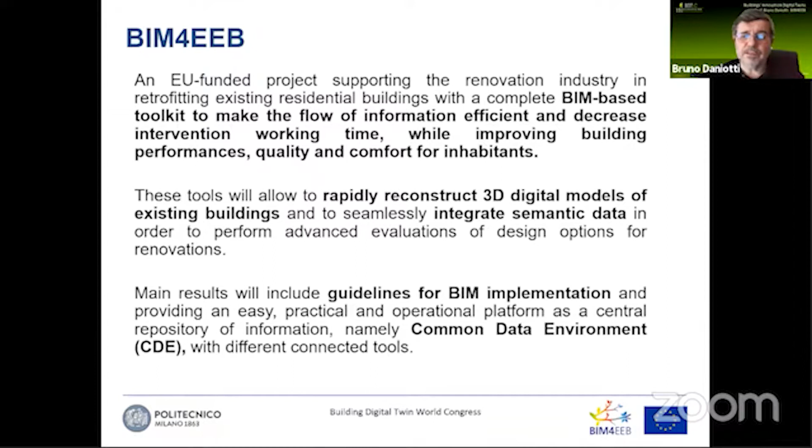The goal is to develop a BIM-based toolkit in order to manage renovation activities, improve efficiency, decrease working time and cost, and also improve performance, quality, and comfort for inhabitants, the occupants of the buildings. Some specific focuses are the reconstruction of BIM models using IFC, open interoperable models for existing buildings, integrating semantic data, ontologies, and linked data. As we have seen in the example with Peter Powers, we are also using these technologies to include data coming from the real buildings. The focus is also to manage everything with a BIM management system organized as a common data environment.

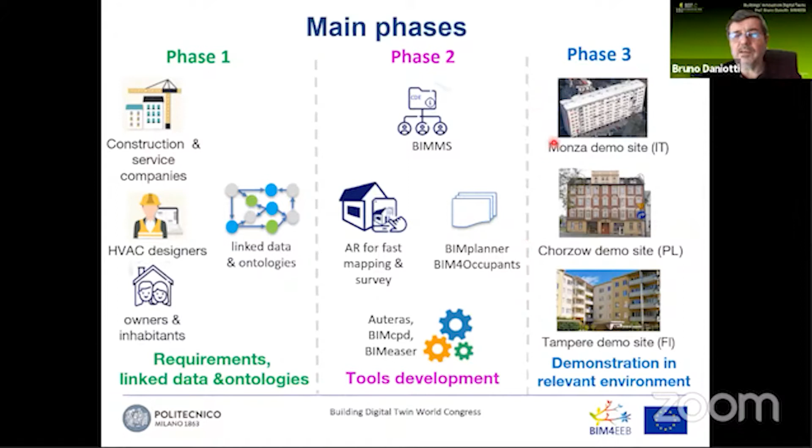So at the moment, the project has developed a preliminary analysis of information requirements with the stakeholders, and a big focus is developing ontologies and linked data to manage the activities. In the second phase, which we are now closing, the toolkit has been developed: the BIM management system, gathering and exchanging data, also linked data; some tools for fast mapping and survey of the building; others for planning the activities; and others for managing information about equipment and so on. Everything is now applied in the demonstration phase on 3 actual buildings in Italy, Poland, and Finland.

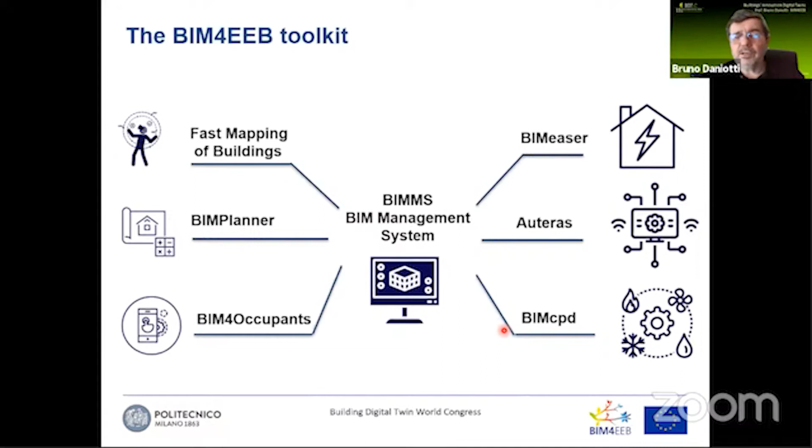So the toolkit has a core BIM management system in order to share all the information in an interoperable way. On one side, we have activities related to managing data: the fast mapping of the actual buildings, BIM Planner to manage the renovation works, and BIM for Occupants to share this information with the occupants of the building. On the other side, we have tools related to the energy efficiency of the building. Some are related to the management of control system automation and the equipment, and BIMcpd is about heating, ventilation, and air conditioning management.

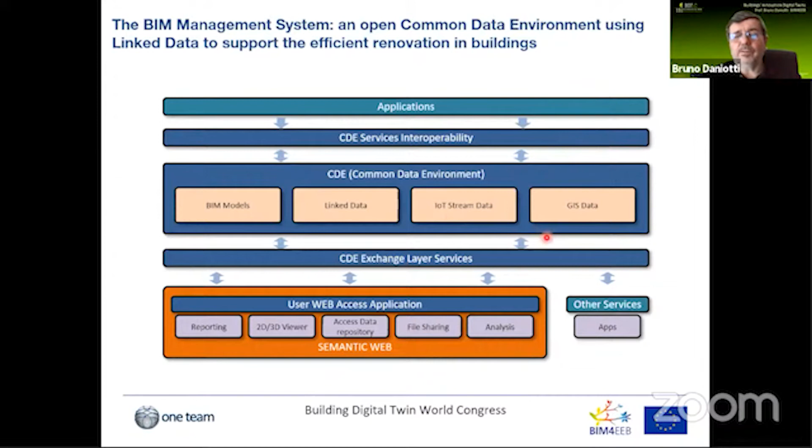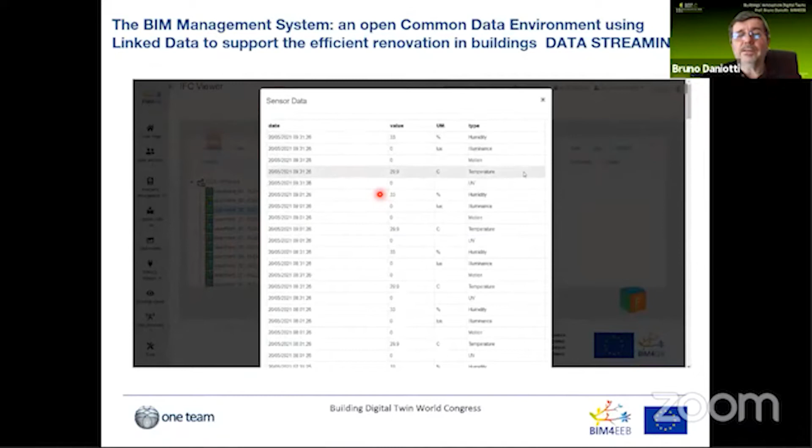So the BIM management system manages all the different data coming from the applications, with different layers for the exchange of data: IFC models, also using ifcOWL to consider linked data technologies, IoT stream data coming from the building, and GIS data to manage information at the geographic level. In this case, we see one example of the IFC of one building, managing also linked data on the sensor data from specific apartments, where it's possible to keep this data and share it with the occupants in order to control comfort and energy levels in the building.

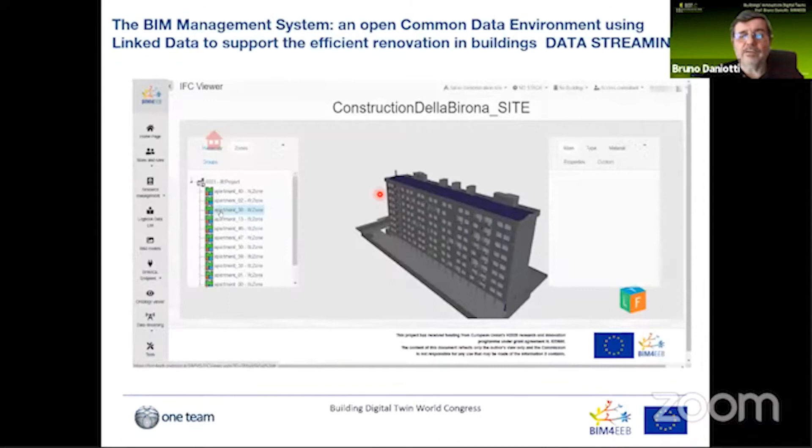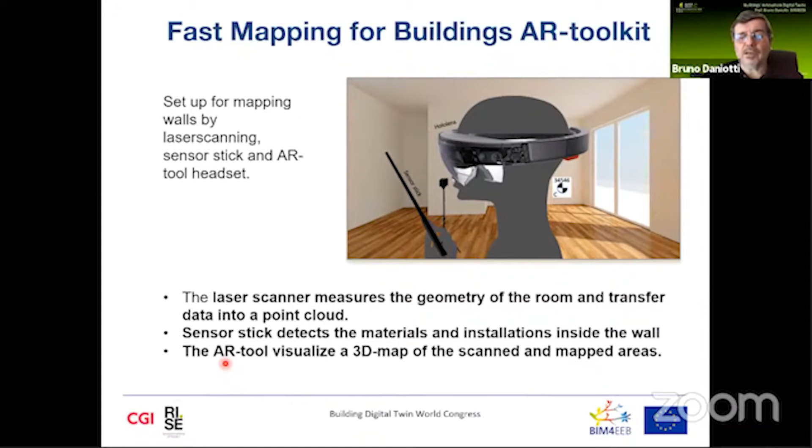One example is the fast mapping tool, where we use a laser scanner to gather all the geometrical data from the buildings and convert this data into an IFC file to reconstruct the as-built of the building. A specific sensor stick has been developed to detect materials and installations inside the walls, for example specific pipes, and an augmented reality tool to visualize the 3D mapping of the building while on site. The results are the BIM reconstruction of the apartments plus, in this example, the structural parts which are not visible but are inside the building walls.

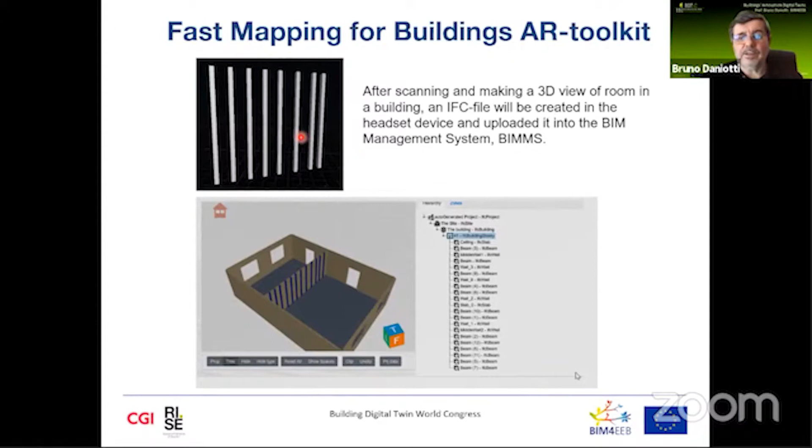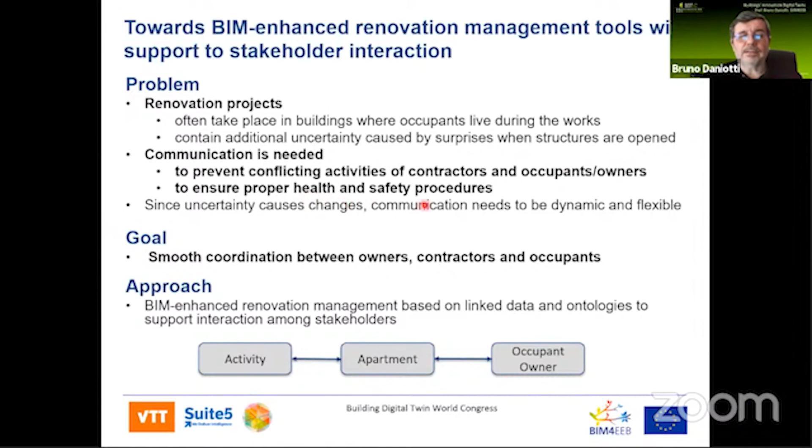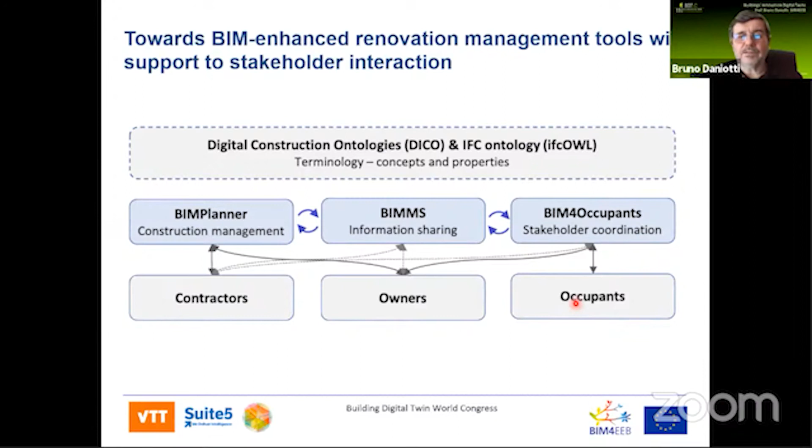Another example relates to two tools, BIM Planner and BIM for Occupants. The focus is to manage the interaction between stakeholders during renovation. The problem is preventing conflicting activities in the apartments by managing information from the contractors, owners, and occupants, in order to ensure health and safety during the renovation works. That's why we developed in the toolkit the sharing of information between BIM Planner, which is about construction management, the owners managing information through the BIM management system, and a specific tool for the occupants, BIM for Occupants, to keep them informed and take into account the availability of the apartments.

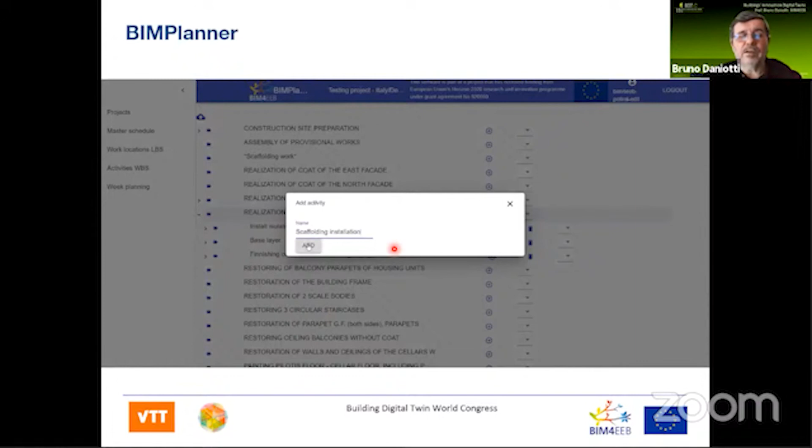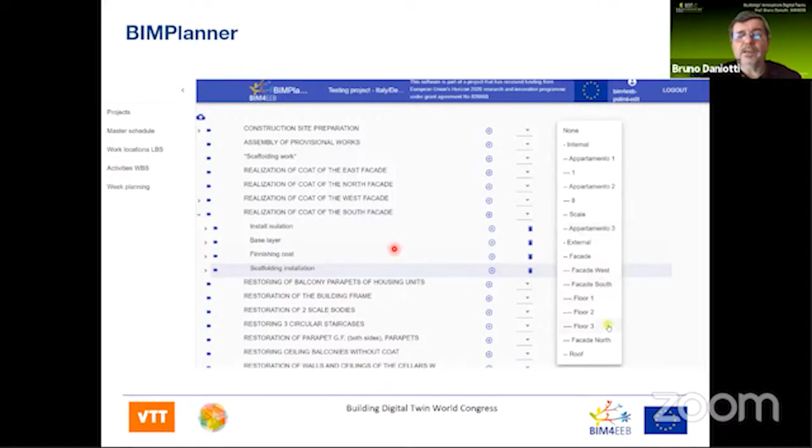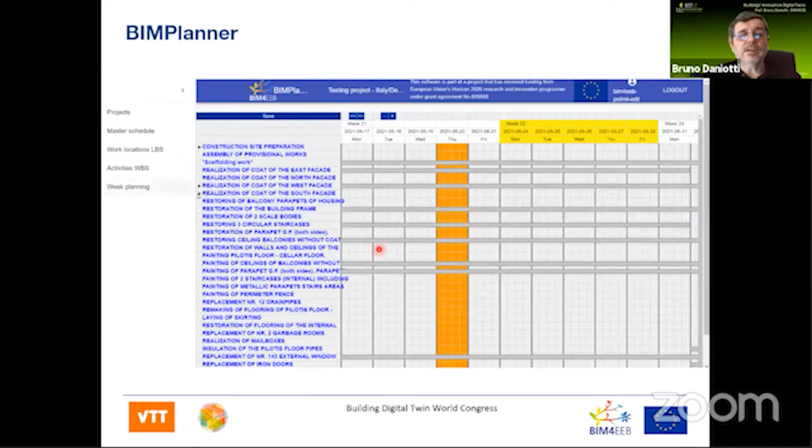That's the example from BIM Planner, from the building model of one of the buildings. This is the definition of the activities, the scaffolding, and the work location of all activities for each apartment, in order to share this information between the facility manager, the owner, and the occupants. When all the locations are related to the activities, there is the whole week planning of the activity. This information is shared with BIM for Occupants, where the occupants of the apartments have information about the comfort conditions, can manage the plans, and also all the information related to the renovation activities.

For all the information, you may have a look at our website, where you can also find all the videos presenting the whole toolkit developed by the project. As I told, some parts of our project may be used in future, for example for developing a digital twin, and we are developing research going towards a digital twin.